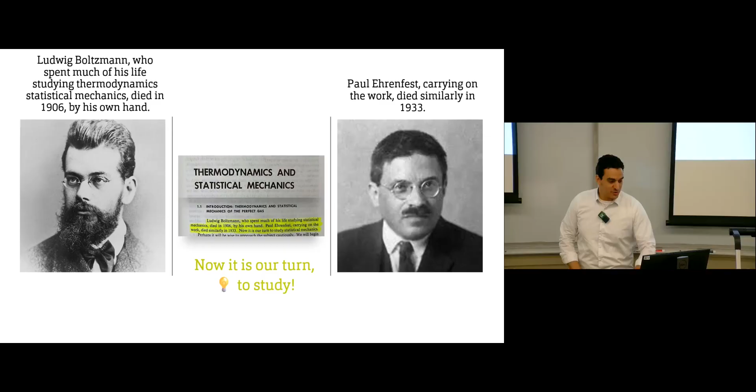Okay. So today again we have chapter 1. Just to remind you, we have 6 points we need to cover in chapter 1. Previous lecture we finished the first 2 points. We made a quick revision of the dimensions and units, and we started to talk about the importance of engineers' roles in energy, what is meant by energy, sustainability, and the relation between energy, sustainability, and these things.

So hopefully today we can finish points 3 and 4. We will start with a quick overview of the history of thermodynamics, how it developed until we have it right now. And then we will explain some of the basic concepts and terminology. These basic concepts are very important because in every chapter you will hear the same items or terms repeated. So it's very important that you understand what is meant by each of these concepts. So let's start with the first one.

So thermodynamics basically appears because of our need to power everything. Before steam engines and the industrial revolution, everything was done by hand. But now we have engines, so there is a need for this kind of automated power that helps people do everything. And the steam engine was one of the first things that made thermodynamics start to appear as a science.

As we mentioned in the previous lecture, thermodynamics is the study of energy. So if you study energy, what you are studying is thermodynamics. But what kind of energy? There are a lot of things about energy we can use. Thermodynamics basically focuses on 2 things. The first one is conversion of energy from one form to another form in order to accomplish any purpose that you need. So I have kinetic energy, for example. I need to convert this kinetic energy into work in order to use this work for something.

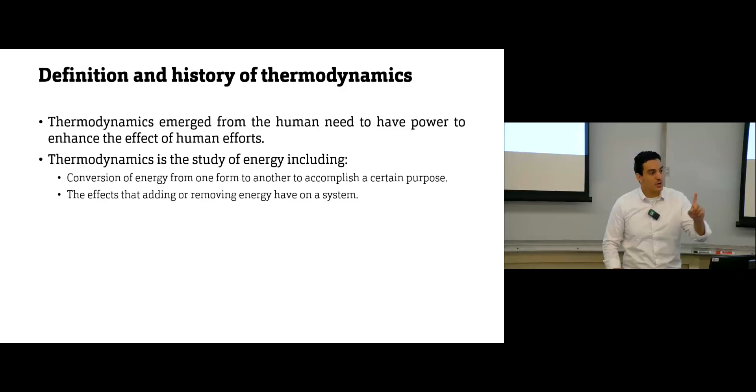So always keep in mind, in thermodynamics we are basically talking about 2 things. Conversion of energy from one form to another form, where the form we obtain is the useful form. We can use it to obtain electricity, to generate heat, whatever we have. And the other thing, if we have a system or process, how it will respond when we add energy to it or remove energy from it.

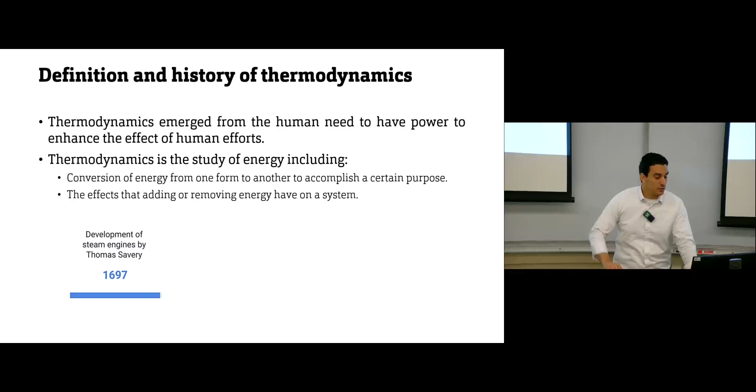Okay? How did thermodynamics appear? It started in 1697 with the development of steam engines. This was the first thing that made scientists and the whole world know that if we have a certain form of energy, we can have another form. The conversion of energy started to appear after this time. Then in 1712, more improvements were made on the steam engine. And then in 1849, the word thermodynamics first appeared, by Lord Kelvin. We know Kelvin because Kelvin is one of the units of temperature measurement.

So this was the first time there was a new word in the scientific community called thermodynamics. As you can see, for almost 150 years people were doing things directly related to thermodynamics, but at that time there was nothing called thermodynamics. After 150 years of steam engines and their development, we started to combine all of these principles together and define a new field of science called thermodynamics.

And then we have the first thermodynamics textbook. This was almost 170 years ago, 1859, and this was by William Rankine. This name is repeated a lot in chapter 5 when we study the thermodynamic cycles and these things.

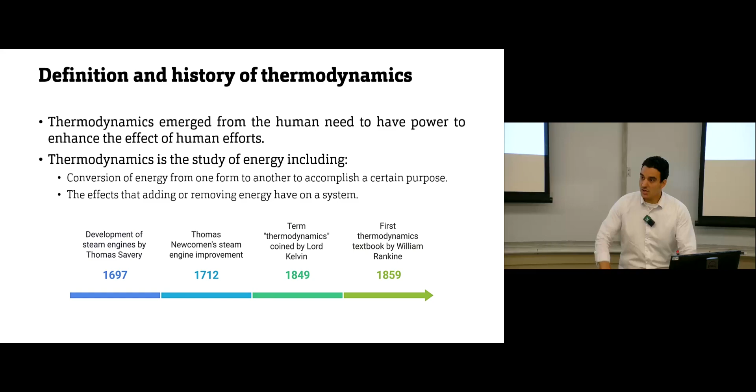So as you can see, it takes a lot of time, tens of years, in order to be developed. Even thermodynamics the way we have it right now took more than this. Because as you remember, Boltzmann started to apply statistics to thermodynamics to give a better interpretation of its fundamental concepts. This was at the start of the previous century.

So it took almost 140 years from having something related to thermodynamics, without knowing it was related to thermodynamics, to having a physical interpretation or even a mathematical derivation of the fundamental laws of thermodynamics. It takes all of these years. And again, how did it start?

In terms of the concepts, it starts with some early foundations. We start with Galileo: what is gas behavior, what is the relationship between temperature and pressure, between temperature and volume, pressure and volume. Then we have classical thermodynamics. We have Carnot, one of the names you will read a lot in the course. We have Clausius, we have Kelvin.

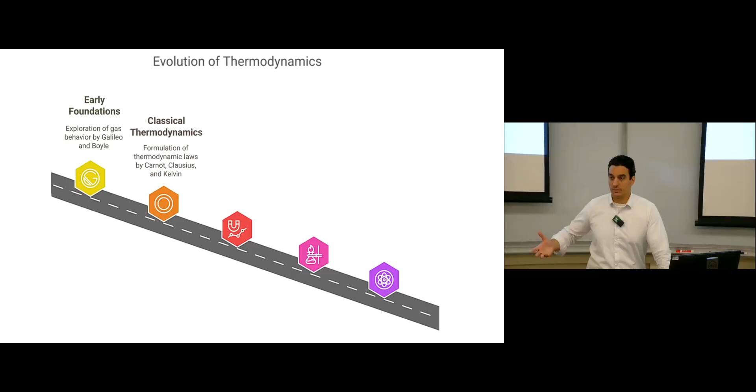All of these scientists started to develop or explain what is defined as classical thermodynamics, and this is something we will also start to explain. Then we have statistical mechanics, mainly by Boltzmann. He tried to use statistics to explain concepts of thermodynamics. So we have statistical mechanics or statistical thermodynamics, which relates to the concept of the quantum that for sure you are hearing about right now.

Then we have chemical thermodynamics, which starts with the concept of Gibbs free energy. This is one of the thermodynamic properties; I think we'll explain it in chapter 6. And then we have the concepts of equilibrium. As I said, we have quantum, all of this modern advancement, and now a lot of advancement is happening in thermodynamics.

Okay, clear? So this is just a brief history of thermodynamics. The concept of thermodynamics wasn't stable from the beginning. It took more than 100 years to put all of these principles and all the scientists' observations together to have a solid science, what is called thermodynamics, which we are studying right now.

Questions? Do you think it will continue to develop into other kinds of thermodynamics? Why not? Yeah. I know someone who got his PhD from MIT, and his idea was trying to develop equations of state. This will be the topic we have in chapter 7. There is always room, because all of these equations have a percentage of error or some limitations in use, so we are still trying to improve them.

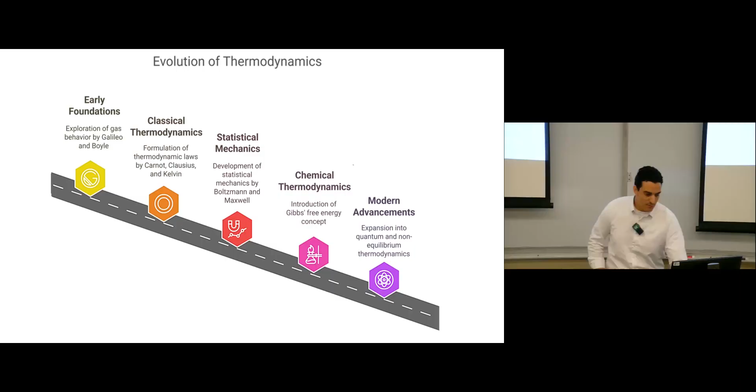Questions? Sure? Okay. Now let's start maybe the most important part of this whole chapter: the basic concepts and terminology. If you miss any of the points I discuss right now, just stop me and ask me to repeat. Make sure that when you leave today, you understand everything we are explaining.

We have a lot of concepts and terminology in thermodynamics. We have systems, states, properties, processes, cycles, steady state, equilibrium. You will hear all of these a lot in the course, and you should know what each of these words means. Systems are one of the basic fundamentals of thermodynamics, so you should know what is meant by a system. Then you should know what is meant by the state of the system or the properties of the system. These are the characteristics, how we can characterize our system.

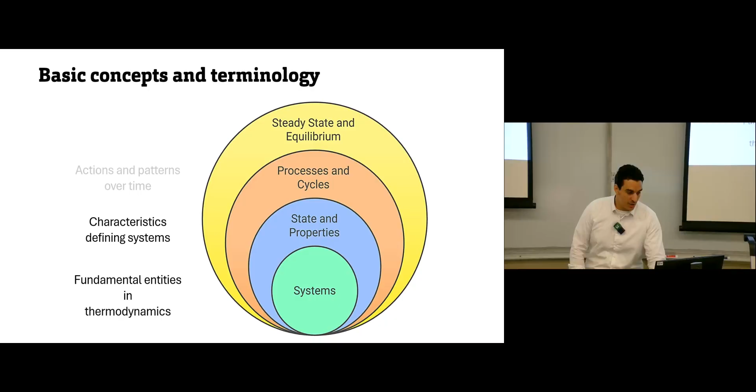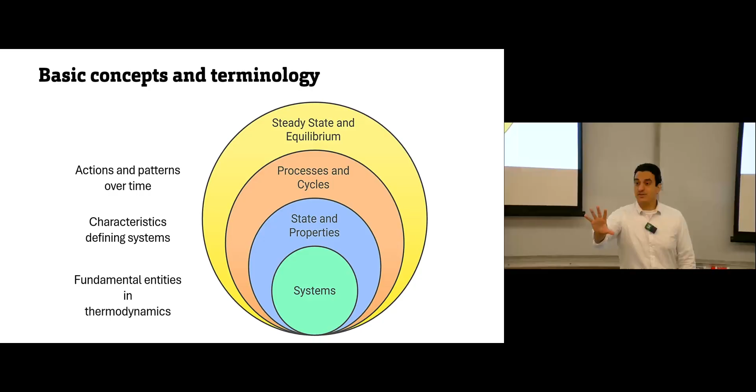Processes and cycles explain the actions, the patterns, the changes happening in the system over time. So what exactly is happening to the system? We have the system, we have characteristics of this system, which is state and properties. Then we have actions, patterns, changes happening to the system over time - this is cycles and processes. And then we have steady state and equilibrium. This is a description of the time stability of the system, the force balance of the system we have.

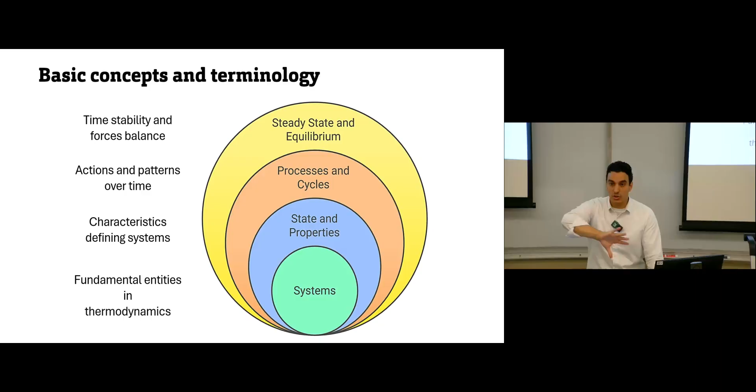So these are the 4 terms. It's very important to understand them as systems first, state properties, processes, cycles, then steady state equilibrium. It's very important to study all of this terminology, because if you remember, our goal from thermodynamics is to be able to design equipment and analyze the performance of this equipment. But in order to achieve this ultimate goal, you should start from the basics.

So we will start with property. What do you mean by property? State, process, cycles - when you understand all of these basic concepts, now we are ready to understand the first law of thermodynamics. Once you understand the first law of thermodynamics, we will introduce another property, which is entropy. After you understand this, then you can understand the second law of thermodynamics. And once you understand these 2 laws of thermodynamics, then you have the basics now to start analyzing several different equipment.

Okay, so let's start by explaining each one of them in detail. So system - this is the basis of the thermodynamic analysis. You cannot do any thermodynamic analysis if you can't define your system, because the system is the part that you are studying, you are analyzing, or you are modeling.

So this is the portion that we have to study. If you have a full factory, for example, you can analyze all of it, so the whole factory becomes your system. You can analyze part of it. You can analyze a single equipment, so this single equipment will be your system. So your system is whatever part that you are studying, analyzing, or modeling, and who decides the system that you will study - this is you. So you will decide what is your system. My system could be a single unit, or multiple units together, 2 or 3 units, or the whole thing that I will study.

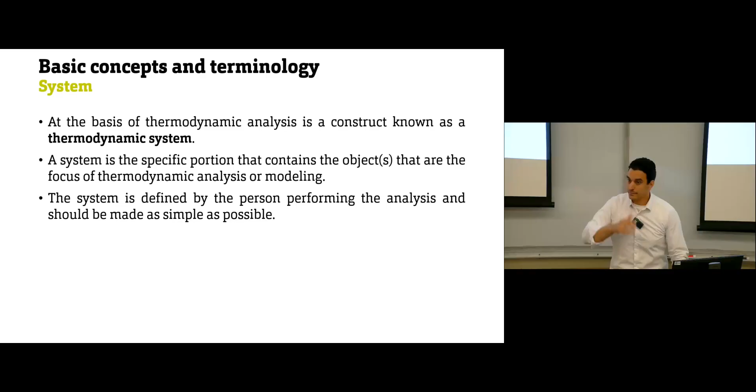So let's say, for example, I have some water inside a bottle like this. One can say, okay, I will select water, and this water will be my system. So I will focus on what is happening in the water itself. Or someone can say, okay, I will study water and the wall of this bottle - now I have 2 things forming the system, the water and the wall. Or someone can say, I will study the water and the air I have inside, excluding the air outside. So here I have the air, then I have the wall, and I have part of the surrounding - so this will be my system.

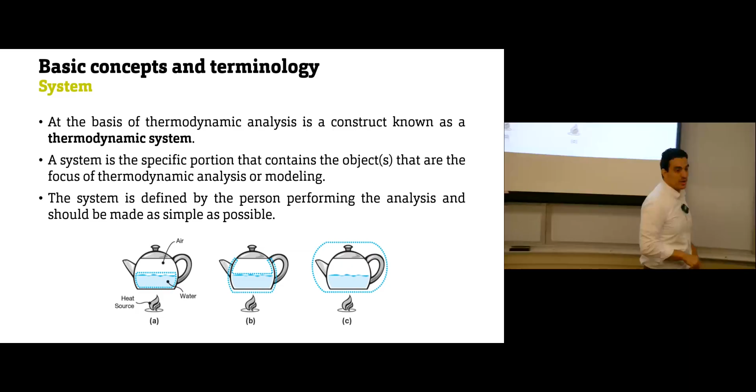So anything that you can decide, okay. The system is the part that you are studying, and it's your responsibility to decide what is the part I will study. System is usually outlined by a boundary - this is the dotted line here, this is called the boundary, as you can see in this one. Anything inside this boundary, this is your system.

Anything outside this boundary, this is your surrounding. So again, we have 3 words that you will hear a lot: system, boundary, surrounding. Boundary is the border. Anything inside this boundary is called system. Anything outside this boundary is called surrounding, as you can see here. So this dotted line is the boundary - anything inside is system, anything outside is surrounding.

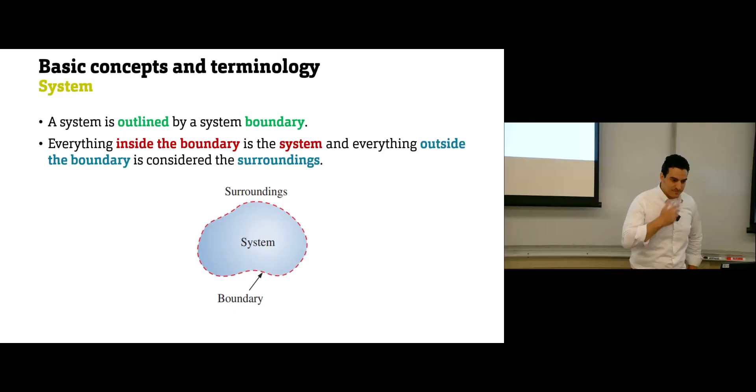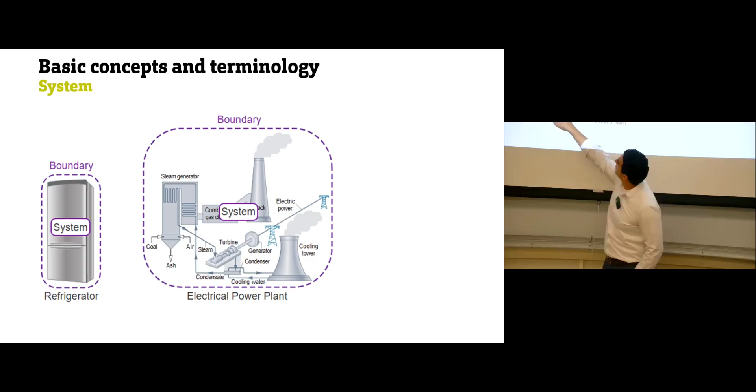So again, a system can be like a refrigerator - someone can study the refrigerator, it will be my system, and I will apply thermodynamic analysis for this one. You can have a whole electric power plant and study all of it at one time, or you can study only the cooling water, the cooling water system. I can study only the turbine, or I can study only this steam generator - so based on your selection. If you have an engine, for example, the whole engine can be my system. So you can decide whatever that you want to study.

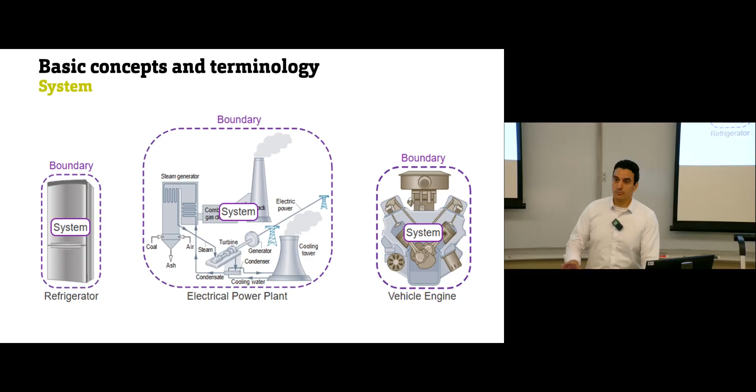Clear? Any questions so far? Okay.

Now, how can we classify the thermodynamic systems? This is your question. So thermodynamic systems can be closed systems, open systems, or isolated systems. Some textbooks say we have three categories: open, closed, isolated. Some textbooks say there are only two categories, open and closed, and isolated is a special case of closed. So regardless of whether it's two or three, just know what the difference between them is.

So let's start with closed system. In a closed system, what is happening? You have your system. There is no mass from the system that can go out to the surrounding. There is no mass that can go from the surrounding to the system. So mass cannot be exchanged between the system and surrounding, but energy can. So the only thing allowed is energy transfer or energy exchange between the system and surrounding.

The system can lose energy to the surrounding. The surrounding can add energy to the system. But the mass is kept constant. The mass cannot change. Okay, so this is called a closed system.

A special case of it is the isolated system. In an isolated system, no mass exchange, no energy exchange. Nothing can be exchanged between the system and surrounding. The system is completely isolated. No mass can leave it, no mass can be added to it, no energy leaves it, no energy is added to it. Okay. The other side is the open system. In an open system, everything can be exchanged. Mass can be exchanged, energy can be exchanged.

Okay? So an example of an open system: flow inside pipes. We have an inlet to the pipe, flow goes into the pipe, flow goes out of the pipe. So we have mass, and also energy can be exchanged. We have compressors, another example of open systems. Turbines, open systems. Expansion valves, open systems. Pumps. Diffusers, heat exchangers, nozzles. All of these are examples of open systems, and all of these exist in chemical plants.

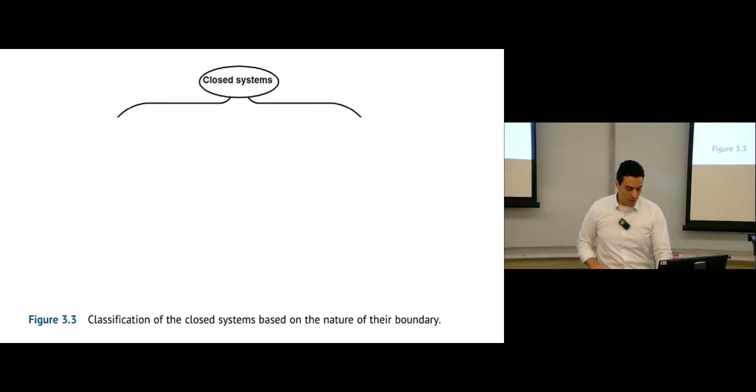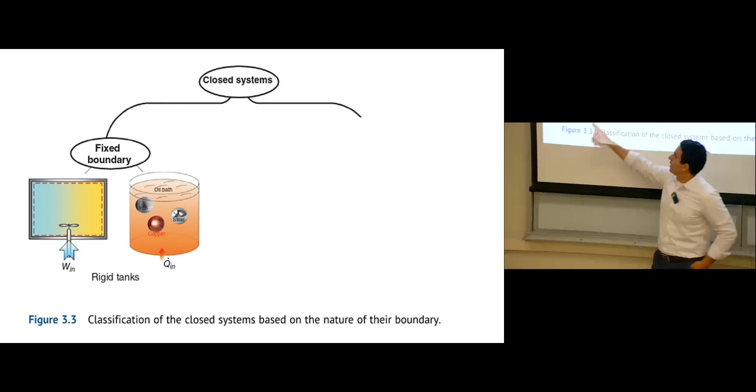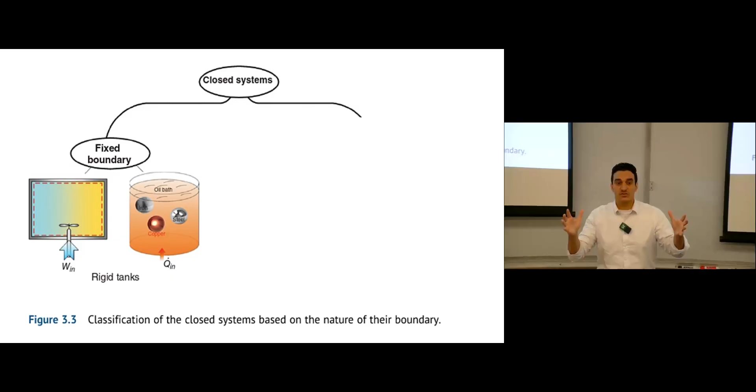Okay. We also have a lot of examples of closed systems, but the closed system itself can be classified into two categories. We can have a closed system with fixed boundary. Fixed boundary means the boundary itself is fixed, it doesn't change. So let's say I have this tank, and there's no inlet, no outlet from this tank, so it's closed. And we have something rotating inside here, and I decide this is my system. I have this rigid wall, so anything inside this wall will be my closed system. This wall is rigid, so the boundary is fixed. It's not changing.

The other side is moving boundary. Let's say I have this piston, and I decide whatever is inside this piston will be my system. If the pressure applied on the piston decreases, then the piston will move up. So what will happen? We will have some expansion happening inside the system. The system will expand. There's still no mass exchange. There is no input to the system, there is no output from it. We only have some expansion happening.

So now what is happening? The boundary itself expands. This is why it's called a moving boundary. The same mass here is the same mass here, but we have expansion happening to this mass because of the pressure reduction. Okay, so the mass does not change. The total mass is the same. We only have expansion. We have a moving boundary.

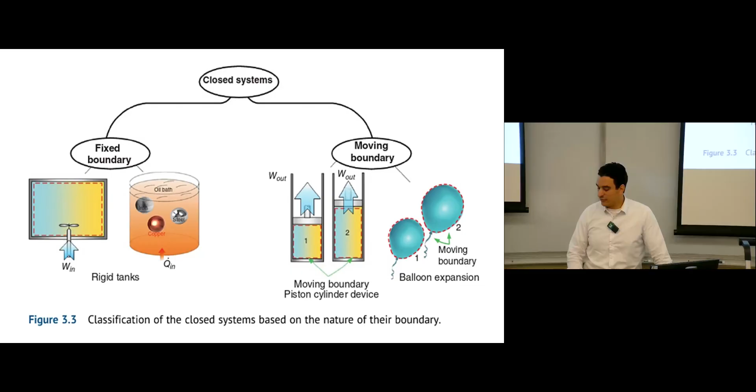Okay. Another example is a balloon. If you are studying whatever is happening in the balloon, if you are putting air inside, it can expand a little bit. So this is another example of moving boundary. So a closed system can have a fixed boundary or a moving boundary as well. Okay. So just to summarize, we have three terms that can describe a system: isolated system, closed system, open system.

In an open system, both mass and energy can cross the boundary. In a closed system, only energy can cross the boundary from system to surroundings or surroundings to system. In an isolated system, none of them can cross the boundary.

Sure, so if we have a system and it's closed, but it has a permeable surface, would we consider that an open system or a closed system? Let's say, like, you have a closed system, and it has, let's say, a paper cup, and we put water in it and the water can seep out. Would that be considered an open system or a closed system?

If you have any mass added to or removed from the system, then it will be an open system. So as long as the total mass of the system changes, this is an open system. Clear?

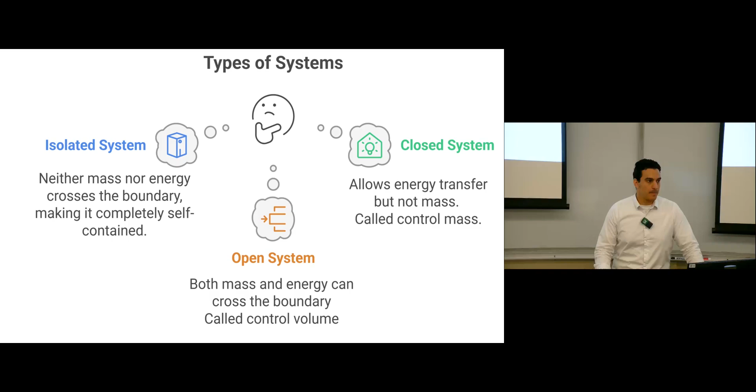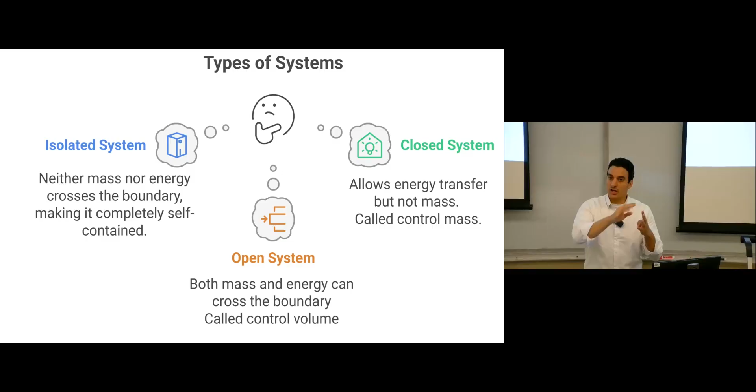Okay, this is the first terminology we have. So what is meant by system? System is the part that you are studying. A system can be open, closed, or isolated. This is the most important point I need you to remember.

The second concept we will explain is properties and states. So what is meant by property? A property is any measurable macroscopic characteristic of the system, something that you can measure and describe as a number. It's something measurable that you use to describe your system, such as pressure — I can measure pressure and give you a number for it — temperature, density, mass, volume. There are many properties we can measure and use to describe or characterize our system.

There are many properties we can use to describe the system, but only the properties related to energy are called thermodynamic properties. These are the properties related to the energy content of the system — they affect the energy of the system. We can classify these thermodynamic properties into two categories.

The first category: we can classify system properties as extensive properties or intensive properties. Then we can say properties can be state properties or path-dependent properties. So again, a property is something we can measure, related to energy, that characterizes our system. Now the key is how to classify the difference between extensive and intensive, and the difference between a state property and a path-dependent property.

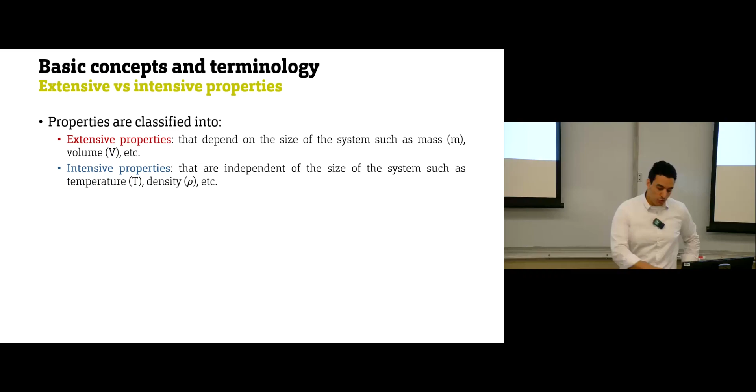So we always have extensive and intensive properties. When we make a thermodynamic analysis, we prefer to use intensive properties rather than extensive properties, because we need to perform our analysis in terms of properties that don't depend on the system size. If we are studying the same thing — say the same unit — one person studies the whole unit, another studies half of it: if you use extensive properties, your analysis will end up with different results because the system size is different. But if you use intensive properties, you'll end up with the same result, because you're using a property that is not a function of the size of the system.

So whether you are using small size or large size, you will end up with the same result. This is why we prefer to have intensive properties. Always in the problems, in the analysis, if we have an extensive property, we prefer to transfer it to an intensive one.

And how can we do this? Any extensive property, if you divide it by mass or by mole, so divide it by the amount of your system in terms of mass or mole...

...then you are converting it to an intensive property. Let's say, for example, if I have V, volume. Volume itself is extensive, but if you divide volume by mass, then we have what is called specific volume, which is intensive.

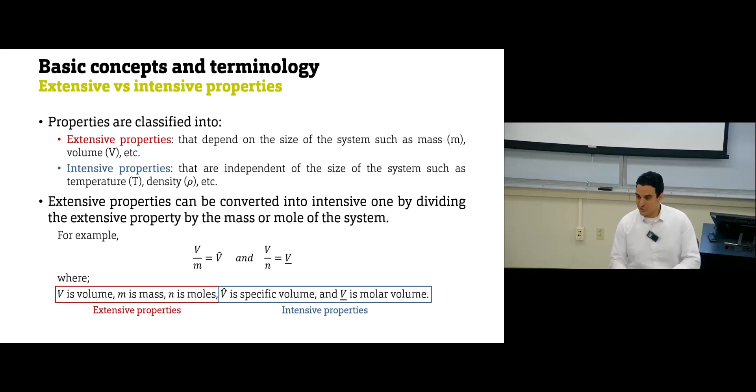This is why I'm trying to keep it as clear as possible. If you use it in the exam, for example, I can understand it, based on the logic behind it.

Since mass is an extensive property, can it be divided by mass itself to make it intensive, or does that not exist? If you divide mass by mass, they will end up with 1, which is constant, and then you cannot change it.

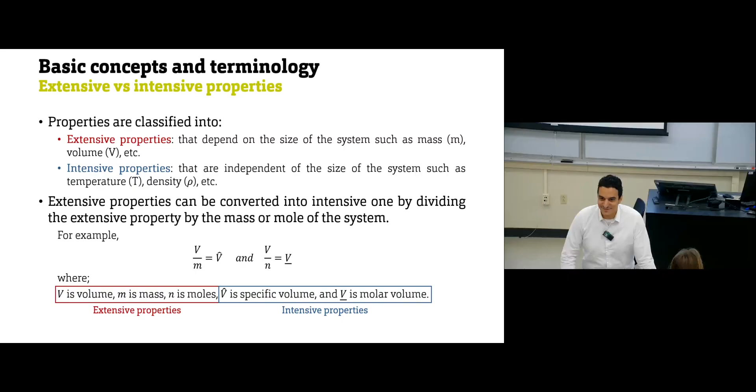The definition of a property is a measurable quantity that characterizes the system. So how do you characterize the system with a constant? At that point it's not a property anymore. So at least it will end up being a constant.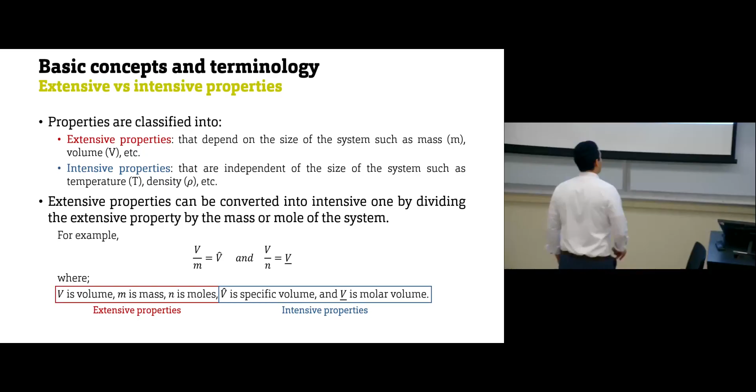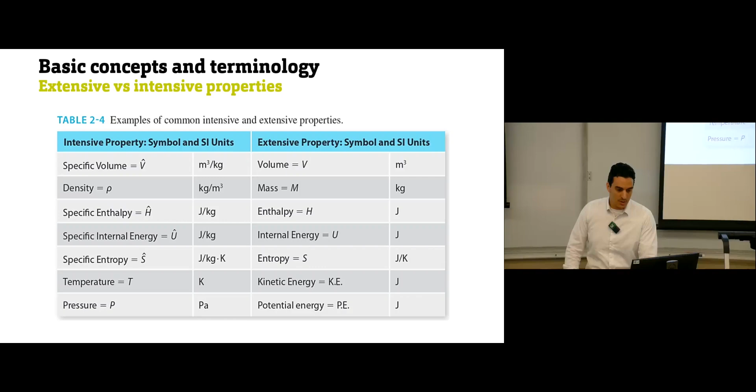Okay, let's see the other category. Now we know that we have properties, we know what is meant by properties, and we know that properties can be extensive or intensive. Now the other category: properties can be state or path dependent.

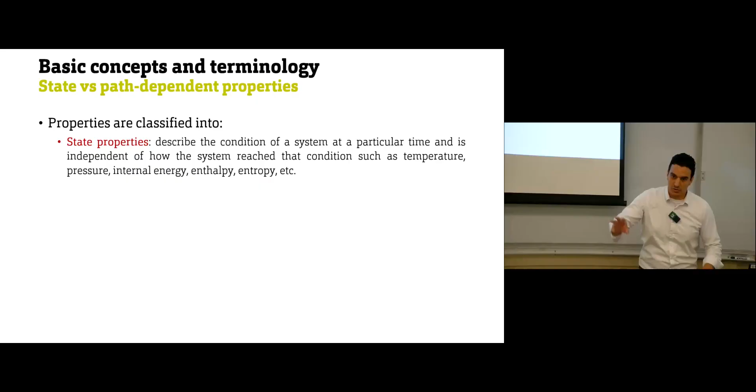So what is meant by this? State properties are described by the conditions at a particular moment, and are independent of how the system reached that condition - similar to temperature, pressure, internal energy, enthalpy, entropy. So what does this mean? Let's assume I have this diagram, and I tell you I have a system at this condition.

Let's assume the y-axis is the molar volume, and the x-axis is temperature. So I have my system at this point: at a certain temperature T1, with molar volume V1.

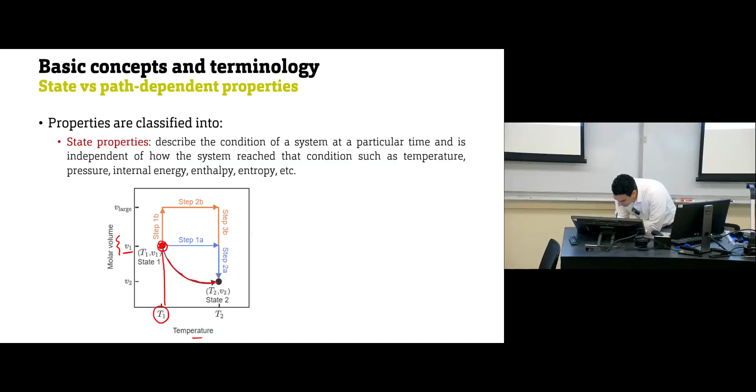Then some changes happen to this system - maybe I add energy to it, remove energy from it, whatever happened. So some changes happen to this system, and the final condition becomes this point, which is T2 and V2.

Now, when I ask you, we can reach from this point to this point by different ways. This is something that will be discussed later, but let's keep it simple for now.

We can go through this black line, which is red right now. We can go through here. So we have some change at constant molar volume, then we are making changes at constant temperature, for example. Or we can increase the volume, then change the temperature, then change the molar volume again to this point. So there are different ways that you can move from the initial point to the final point.

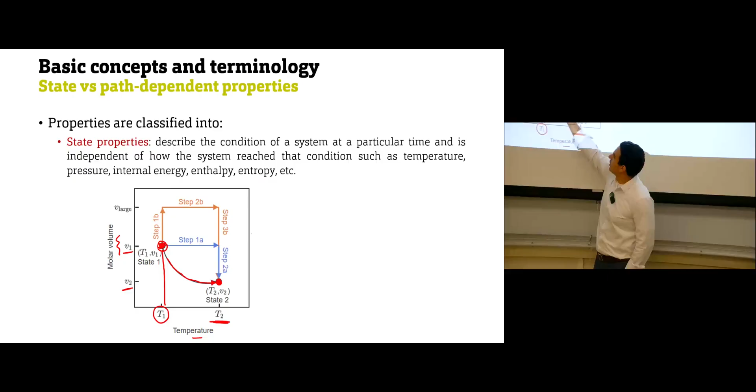But do you think that the way of this movement, the way of changing from point 1 to point 2, will change the initial or final conditions? So T2 will be the same, right? Regardless of whether you are going from the initial to the final point by this path, or this path, or this path, regardless of the way that you are moving from point number 1 to point number 2, the conditions at point number 2 will be the same.

There is no difference. So this is what's called the state properties. It doesn't matter how you move from point number 1 to point number 2. At the end, I want to know what the conditions are at point number 1 and what the conditions are at point number 2. What is happening between 1 and 2 doesn't matter. Clear? Questions? Okay. So this is called the state properties.

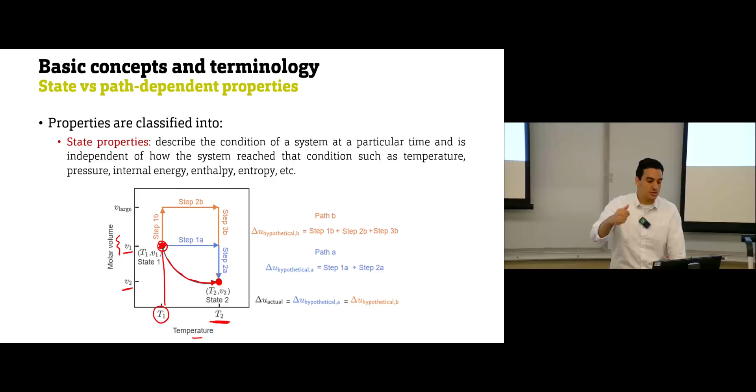And also, this is something that we can see, but you can also calculate delta U for this path. This will be the same as delta U for this path, the same as delta U for this path. So even the property difference between these 2 points will be the same regardless of the path. So if you have something like this, this is a state property. And again, temperature, pressure, internal energy, enthalpy, entropy, all of these lie in this category. Clear?

The other one is path-dependent properties. Path-dependent properties, this will be the other side. The value of the property depends on the path, how you move from point number 1 to point number 2. Based on this path, the value of the property will change. Let's take an example for this one.

So let's assume I have this piston, for example, and this piston initially was at this position at point number 1. This is my initial position. Then you are reducing the pressure for this piston. This piston is going up from point number 1 to point number 2. So you can go from point number 1 to point number 2 in a certain path.

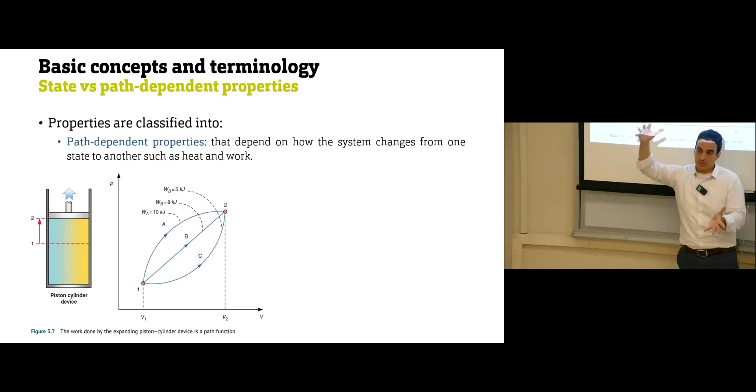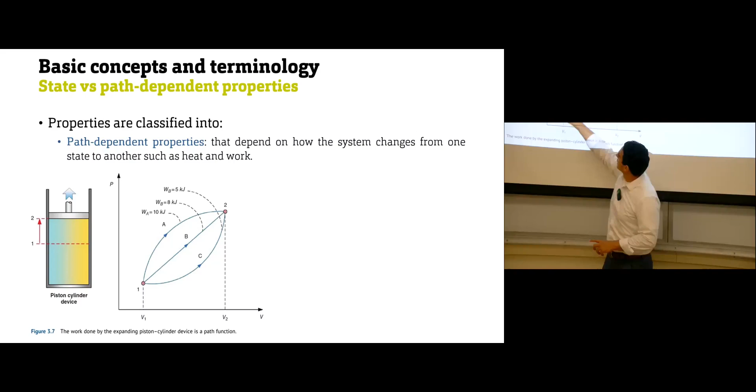Someone says, okay, instead of reducing the pressure, I will increase the temperature of the working fluid, so the piston will expand, right? So the piston will also move from point number 1 to point number 2, but the movement will not result from the pressure reduction, but from the temperature increase. Make sense? So now you are doing the same thing, moving from point 1 to point 2, but with a different mechanism. This is why you can have different lines describing the way you move from one point to another.

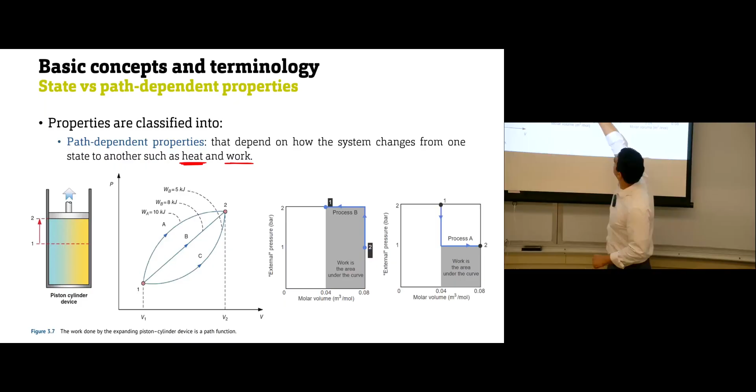But someone at point 1, the same point here, and here we have point 2, can say, from point 1 I will go here, and then this way. So now he has a different path. The area under the curve will be this gray area, so the work will be different. So heat and work are path-dependent properties. They rely on how you move from the initial point to the final point. The way you are moving affects the value of this property.

Clear? Any questions? Let's start from the beginning. We started with systems, remember? This is the part that we will be analyzing. Systems can be open, closed, isolated. Then we have properties, measurable quantities that characterize the system. Properties can be state functions or path-dependent functions. Properties can be extensive or intensive. Clear? Any questions so far?

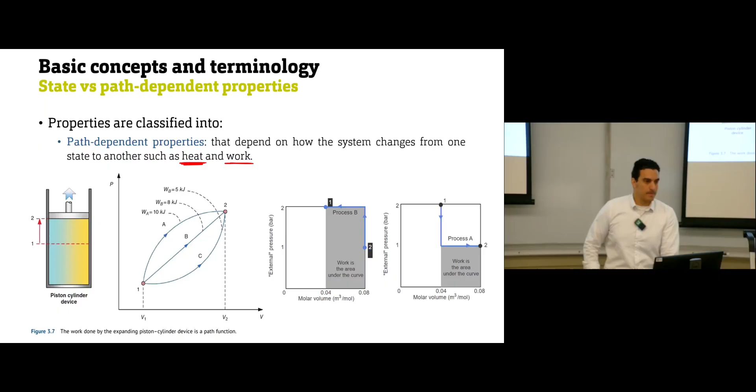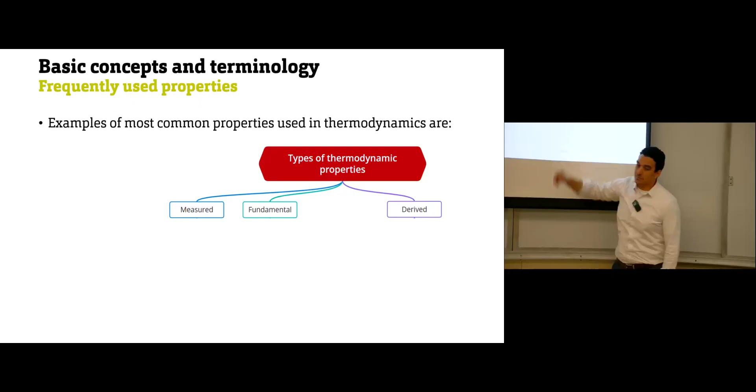Okay. As we said, we have a lot of thermodynamic properties. Any thermodynamic property either can be measured, that you can measure with very simple experiments, or it's a fundamental property. We have fundamental laws that we will describe in next chapters, fundamental laws that we can use to calculate this property, or properties can be derived properties. So the measured properties, similar to heat capacity. This we will discuss in chapter 2.

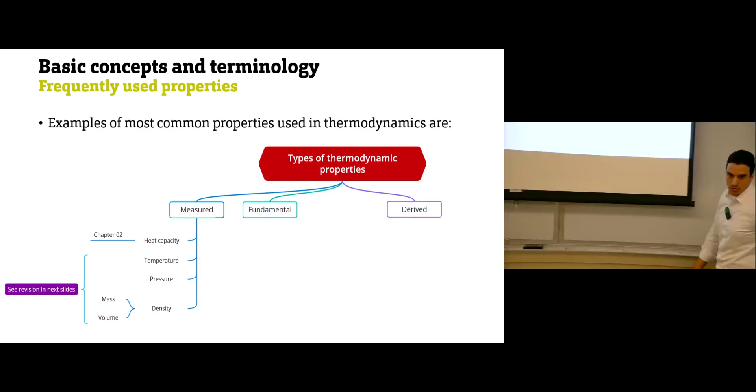We have temperature, we have pressure, we have density. Density is mass over volume, and we will just give you a quick reminder of how we can calculate these things. Then we have fundamental properties, which are internal energy and entropy, and this is the chapter where we will see each one of them. Okay. Then we have derived properties, so we have enthalpy, Gibbs free energy, Helmholtz energy. So this is the whole set of thermodynamic properties we will study, and in each chapter you will see each one of them. Okay? Questions so far? Clear?

Okay. So let's start with the basic ones: temperature, pressure, density. That's something that you know from previous courses. Just a quick reminder. You know that temperature we can define with different scales. There's Kelvin, Celsius, Fahrenheit, Rankine, and the relationships between them are these. Temperature in Celsius is Kelvin minus 273, Fahrenheit is 1.8 times temperature in Celsius plus 32. And when you have a problem, make sure whether you are measuring the temperature or a temperature difference.

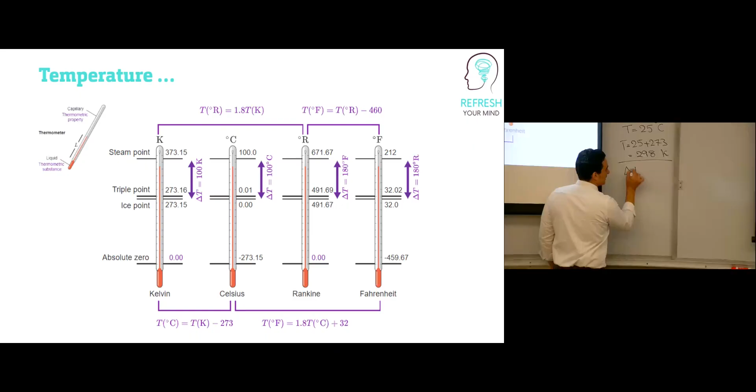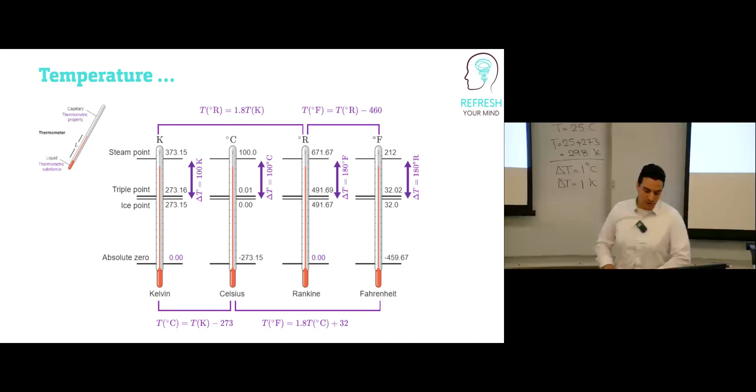Because if you have, let's say, temperature T is 25 degrees Celsius, and I ask you what will be the temperature in Kelvin, what you will do is T is 25 plus 273, so you will say the temperature will be 298 Kelvin. So this is the absolute temperature value. But if I'm telling you that delta T, the temperature difference, is 1 degree Celsius, what will be the temperature difference in Kelvin? Exactly, it will be 1. Okay, so the temperature difference is the same, but the temperature is changing. So always make sure of this. Don't get confused with these things. So this is a quick thing that you need to remember about temperature.

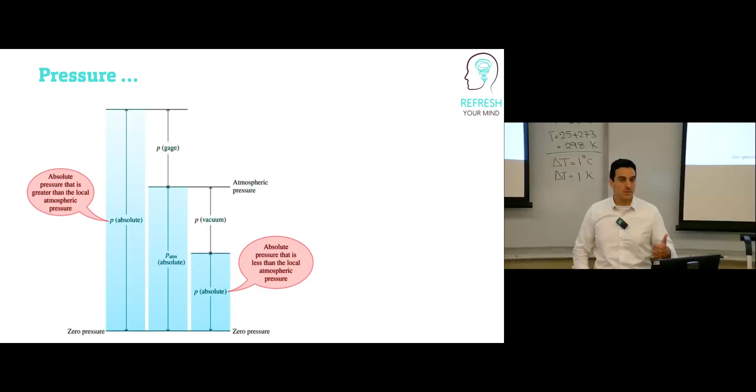Then we have pressure. As you know, we have three kinds of pressure. We have absolute pressure, we have gauge pressure, we have vacuum. So the relationships between them: the value of the pressure above the atmospheric pressure, this is what is called gauge pressure. Then we have the vacuum, the value of pressure below the atmospheric pressure, and the relationships between them are that the absolute pressure is the atmospheric pressure plus gauge, and the atmospheric pressure is the absolute plus the vacuum. So always keep this in your mind.

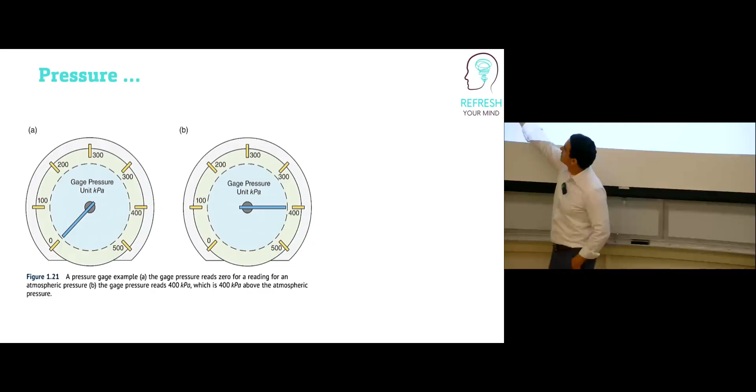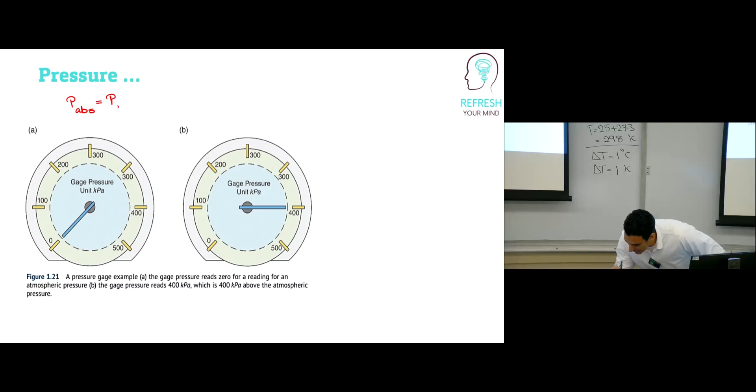All the instruments that we are using to measure pressure are measuring the gauge pressure. So let's say you have a pressure gauge and the reading is 0. Does it mean that the pressure is 0, or does it mean that the pressure is atmospheric? So again, recall this equation: absolute pressure is atmospheric plus gauge. So we have absolute pressure, this is the atmospheric pressure plus gauge pressure. This gauge pressure is what is measured by pressure gauges. So most pressure gauge instruments are measuring the value of the gauge pressure.

So if I give you this instrument here, for example, you fix it on a pipeline and it gives you a reading of 0. Does this mean the working fluid inside this system has 0 pressure, or the pressure is equivalent to the atmospheric? Atmospheric. So if this is 0, the absolute pressure, the actual pressure inside the system, is the atmospheric pressure. Clear? Any questions? Okay. Again, you put a pressure gauge on a unit, and the reading is 400. Does this mean that the absolute pressure is 400? No, it means that it's 400 plus the atmospheric pressure. Okay? So always remember this one.

And for sure, remember that the relationship between pressure and altitude is inverse. So as you are going up, the altitude increases, the value of pressure decreases. Okay? Questions?

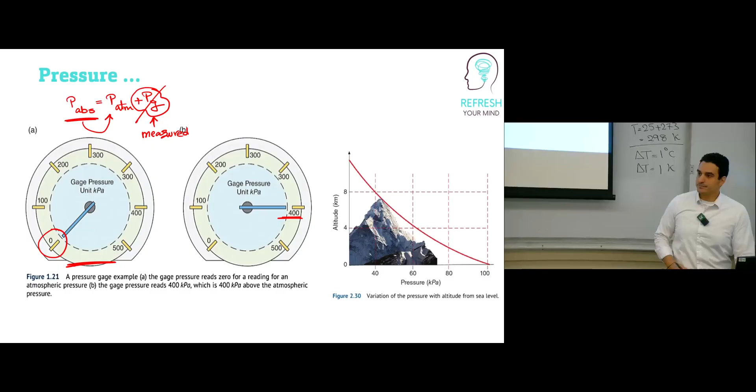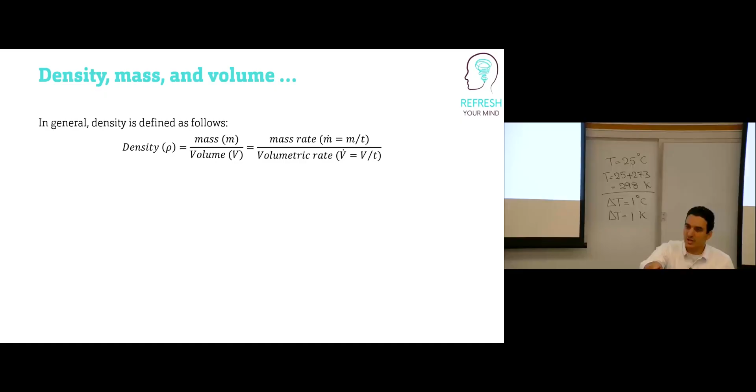The last part I also need to remind you of, because you will use this set of equations in a lot of the problems, is the density calculation. Density is mass divided by volume. If you are dealing with open systems, you usually have mass flow rate and volumetric flow rate. So we have m dot, mass rate, divided by V dot. This is the dot that you are asking about, right? Yes. Okay. So the dot is usually used with rates, the property divided by time. Okay.

Also, density can be calculated if you have information available about something called specific gravity. Specific gravity of any substance is the density of this substance divided by the density of a reference. And this reference is water, whose density can be 1000 kilogram per meter cube, 1 gram per centimeter cube, or 62.43 pound mass per feet cube. Different systems of units, remember? We have the SI system and the American system from the previous lecture. So we can also use this specific gravity formula to calculate density.

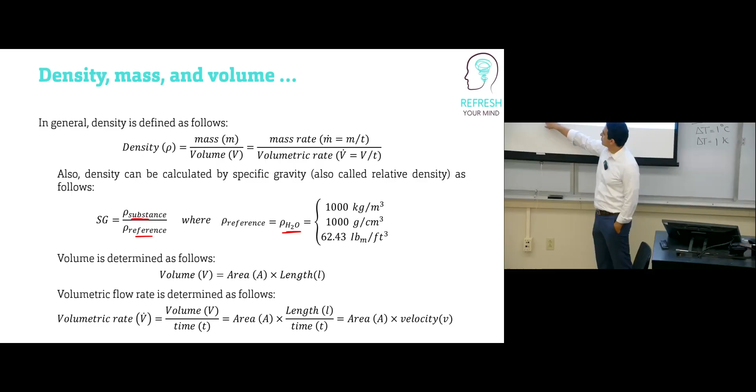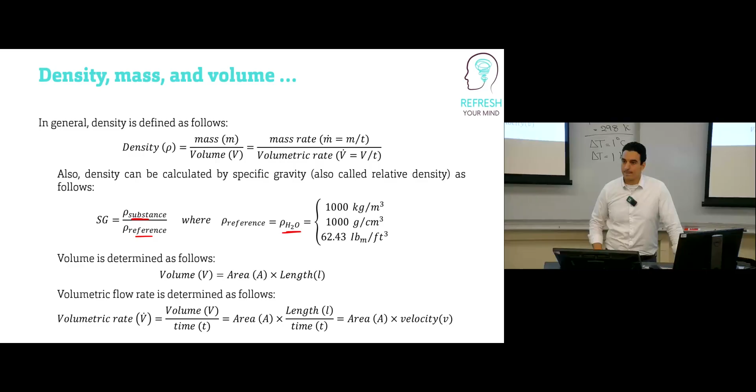Volume is nothing but area times length, like any system you have. Volumetric flow rate is volume divided by time. We know that volume is area times length, so it can be area times length divided by time, and length over time is velocity, so the volumetric flow rate can be area times velocity. Just very basic equations that you will use in a lot of problems we have in the course. Clear? Any questions?

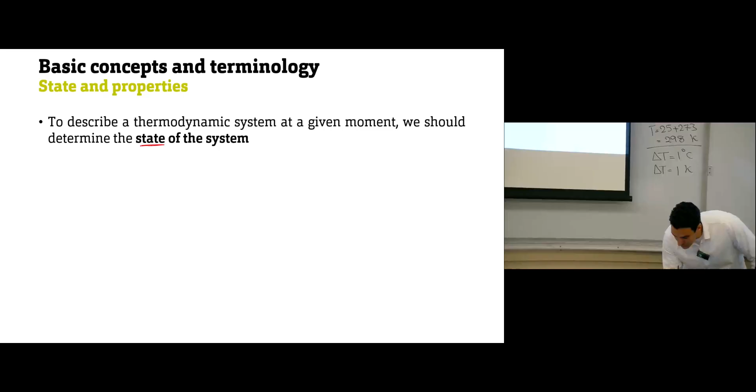So now we have discovered what is meant by system and what is meant by properties, and the last part here is to describe the state of the system. In order to describe a thermodynamic system, we need to describe what the state of the system is. We describe the state of the system by finding the values of the properties. If you can say, I have this system at this temperature value, at this pressure, at this enthalpy, then by putting all of this group of properties together, what you are doing is describing the state of your system.

So let's say, for example, I have here one system. Mass of this system is 2 kilogram, temperature 20 degrees Celsius, volume is 1.5 meter cube. So this is state number 1. If some changes happen and it moves to this one, mass is 2 kilogram, 20 degrees Celsius, volume is 2.5 meter cube. This is a different state, because at least one value of the properties changed.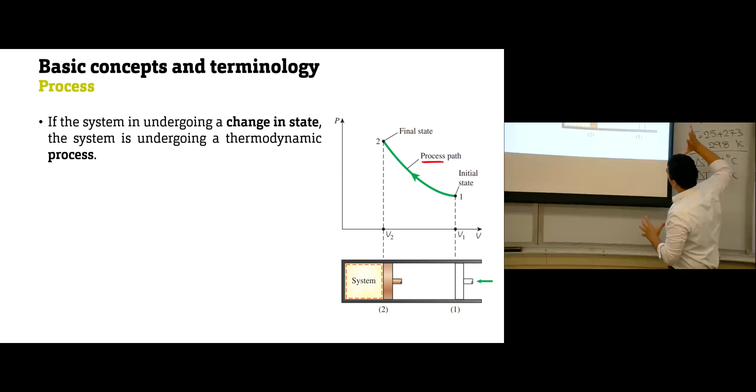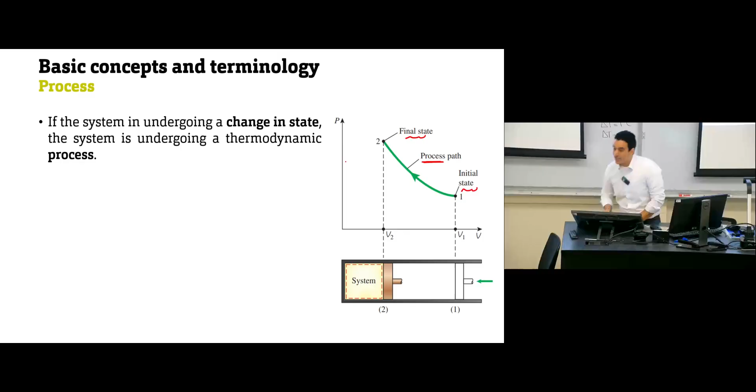Let's say you have two states and you are moving from one state to another one. This is called a process, not a cycle. So let's say my piston was here, and my system takes all this area, so the volume is V1. Now I compress the piston and reduce the area, so this is my final state at V2. The way I am moving from state number 1, the initial state, to state number 2, the final state, is called a process path. My path, or my process, is the change I have in the system.

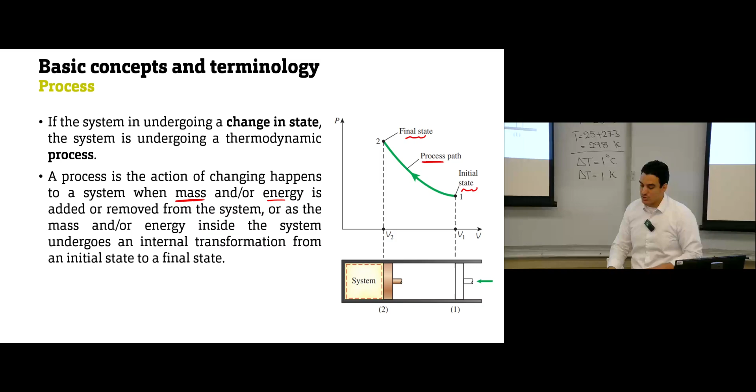And this change can happen because of a lot of things. We can have mass exchange, we can have energy exchange, energy added or removed from the system. We have internal transformations that also may happen. So anything can cause it. Exchange of mass or exchange of energy makes your state change from one state to another one. And again, the way the state changes is called the process path.

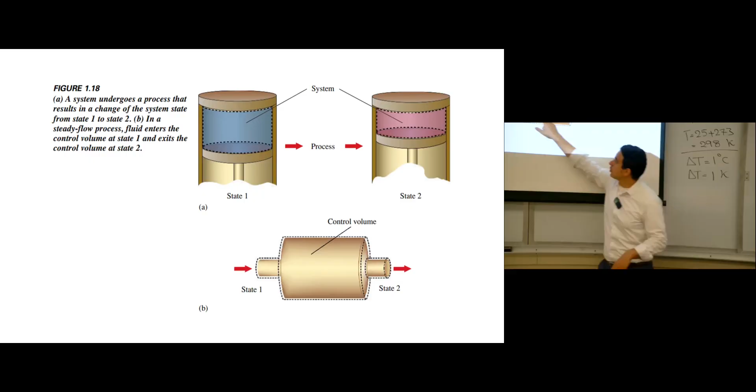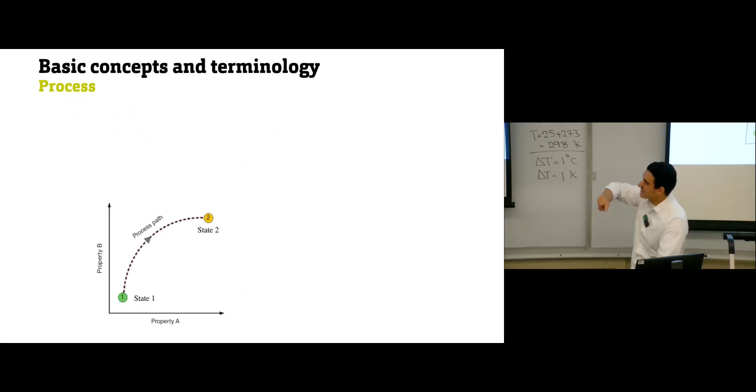Again, one example. This is the example I said: we have a piston, and you compress the piston, so we have a process where you change from one state to another one. In an open system, usually the inlet has a different state and the outlet has a different state. So the whole open system is considered a process, because the inlet and outlet are at two different states. So again, the process describes the path between state number 1 and state number 2. But usually in thermodynamics, when you study systems, a system will not have just a single process path.

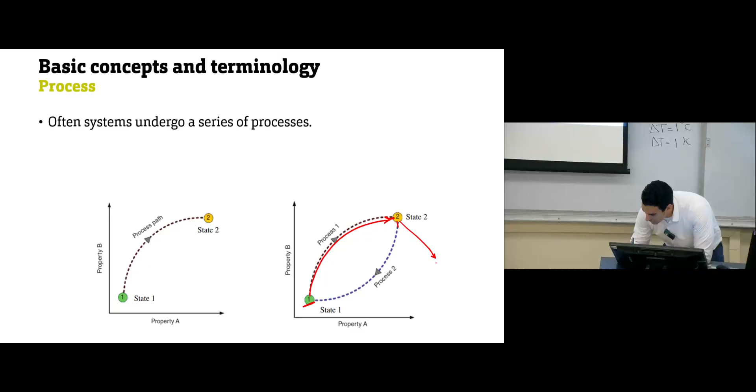It can have multiple. So this is why you can have a system at this state, then it moves to state number 2, then it moves maybe to state number 3, then moves to state number 4, and stays at state number 4 as your final state. Or as in this figure here, it can move to state number 2 and then go to state number 1, for example. Okay, so usually you have a series of processes happen. The final state and the initial state are not necessarily the same, but sometimes they are the same.

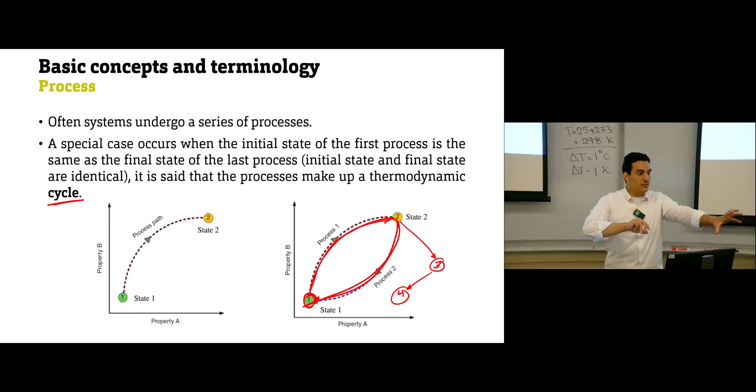And if the initial and final states are the same, similar to this one, so I start at point 1, and at the end, I end at point 1. So now this process we call a cycle. So a cycle is a special case of the process. A process describes the change, in general, happening between a state and another state. The cycle is like a process that consists of a series of states or series of processes, but whatever the initial state is, it will be the same as your final state. So it is this one here, for example.

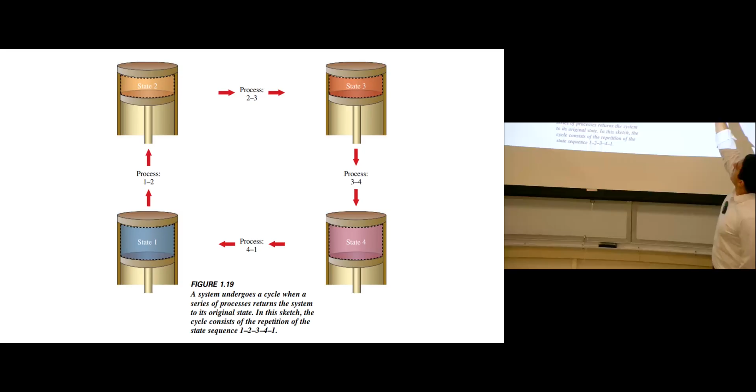I have this piston at state number 1. Then I compress the piston. I move to state number 2. Then I have some changes happen. I move to state number 3. Then I have other changes happen. I go to state number 4. From state number 4, I return again to state number 1. So if you put this in a diagram, for example, you can represent it by something like this. From 1, I go to state 2. From 2, I go to state 3. Then I go to state 4. And then from state 4, I end up at state 1. Final and initial states are the same. So this is called a cycle.

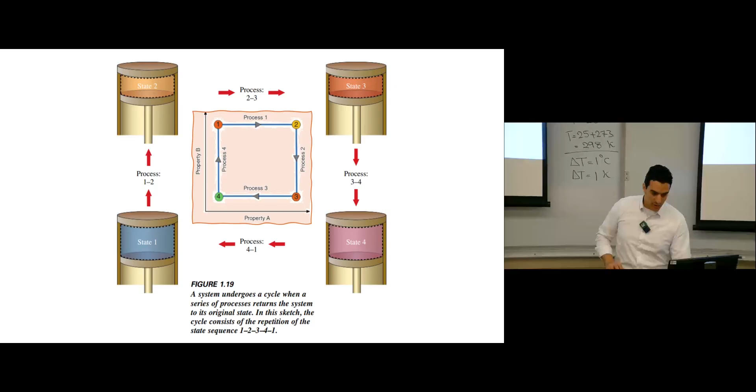Okay? So again, just a quick summary. We have system: open, closed, isolated. We have properties, measurable quantities, which can be extensive, intensive, state or path functions. Then we have process, the change that is happening in the system from one state to another one. A special case of the process is the cycle, when the initial and final states are the same. Any questions? Okay. The last thing that we'll explain, as we said, we have the process, it describes the changes happening

to the states. So just some quick names. Your system may have some changes. The states can change at constant temperature, and in this case, this process will be called isothermal. So when you hear this word isothermal, it means there are some changes happening, but these changes happen at constant temperature. Or changes can happen, but the pressure will be the same, and then the process will be called isobaric. Changes may happen at constant volume, and then your process will be called isochoric. Changes occur and entropy will be the same, so this is called isentropic.

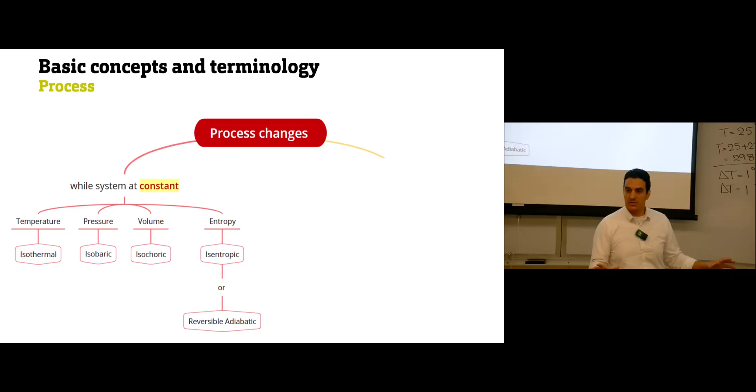So usually in the problems, I can give you some numbers, but in the description of the problem, I tell you we have an isothermal process. I didn't mention anything about temperature. Then you should know that isothermal means the initial and final temperatures are the same. Okay? The process is isobaric, so I'm telling you that we don't have any changes in the pressure in this problem, for example. Clear? So it's very important to know what is meant by each of these words. This will be repeated a lot.

So sometimes we have changes happen in the process without exchanging heat, and this is called adiabatic. So when you hear this word adiabatic, it means there is no heat added to the system or removed from the system. There is no energy exchange. We will explain in, I think, chapter 4, the difference between reversible and irreversible. So your process may be adiabatic and irreversible. So when you hear adiabatic, it means the process is irreversible and there is no exchange of heat. It's isolated. No heat added, no heat removed. This is what should come to your mind when you hear adiabatic.

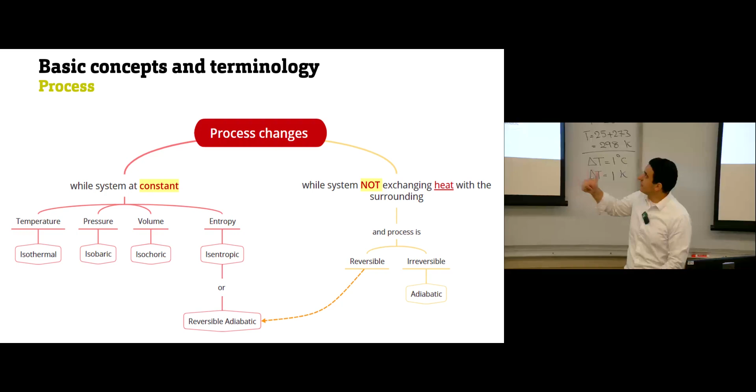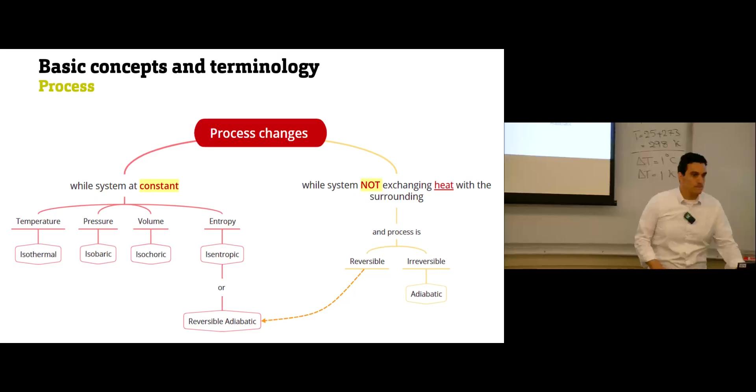But let's say there is no heat exchange and at the same time the process is reversible. If the process is reversible and adiabatic, it can be called reversible adiabatic or isentropic. So again, there is a link between these two types here. If you have reversible and no energy exchange, the process is reversible adiabatic, and reversible adiabatic can be isentropic. Okay? Is it clear? Any questions? Sure.